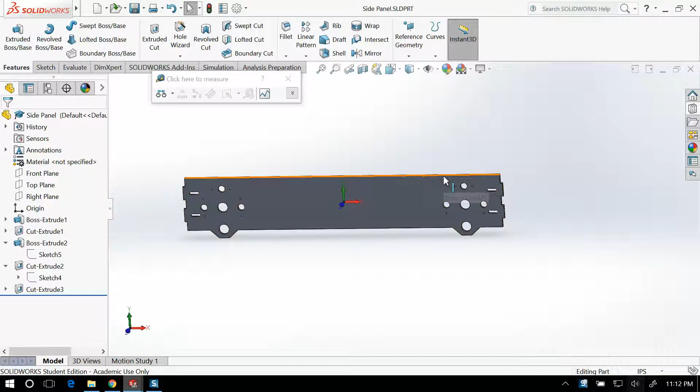Hey again, so what we're going to do now is actually create some tabbing at the top of our side plate so that we can start putting our top plate on. I'm not going to show yet exactly what our top plate is going to look like, but at the very least you should have some idea now that in order to make the robot pieces fit nice and snug together, we want to actually make some cuts in the actual metal so that they fit nice and snugly, and the bolting is just to keep everything in place without actually flying off. Okay, so let's get to that.

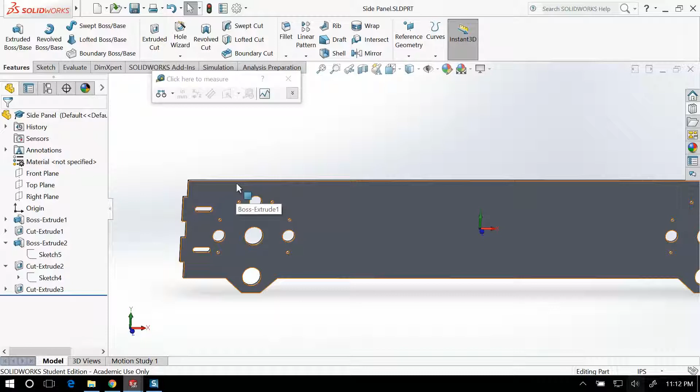Remember this is what our side plate should sort of look like now. I have my slots and my gearbox associated with this. In order to put something on the top, I'm going to want it to slot in or at least rest on the top without sliding back and forth. To prevent that, the top plate is going to have tabs, so I'm going to need to create some form of squared slots or little cutouts, teeth, or I guess anti-teeth, to allow the top plate to fit into.

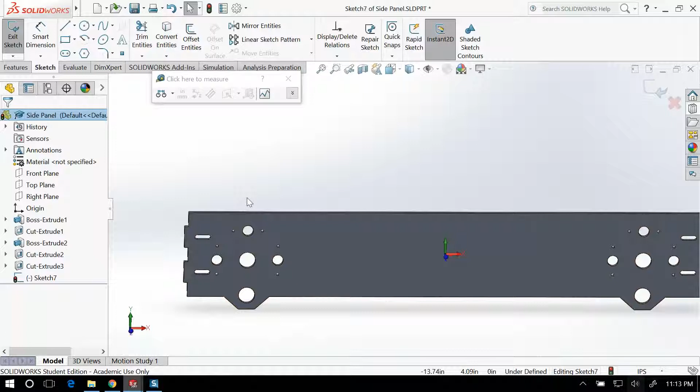So let's create a sketch. Once again, yet another sketch on this plate. You can start seeing that I have lots of sketches associated with cuts and extrudes here. This sketch is going to create a bunch of holes or teeth holes in the top of my robot. Let's just start off with one corner rectangle, and then go from there and see how many we can fit on. The width of my rectangle I want to make exactly 1 inch.

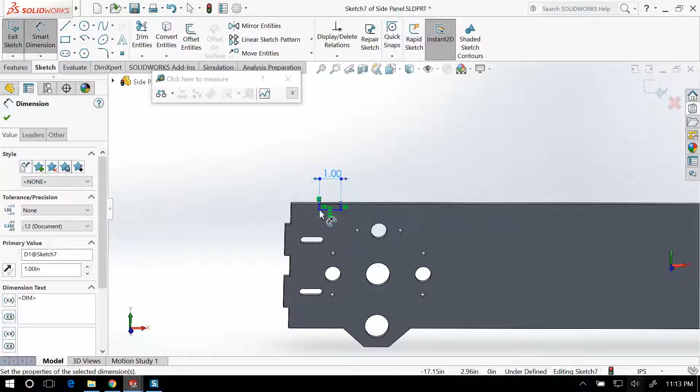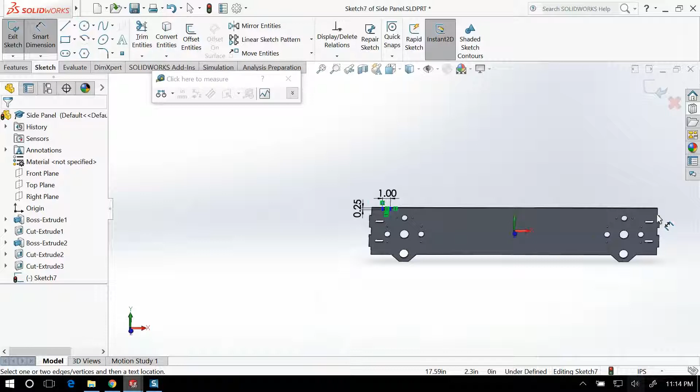Now the depth of it, that is always fixed. That's not up to you, that's up to the metal. Hopefully you realize by now that the thickness of the metal is exactly 1/4 inch. Now we're faced with a question of how we place all of these teeth along the top of this robot. I don't want to have a million teeth along the top, because that's going to be much longer to cut, and it just doesn't look nearly as nice. So let's play around with the linear sketch pattern.

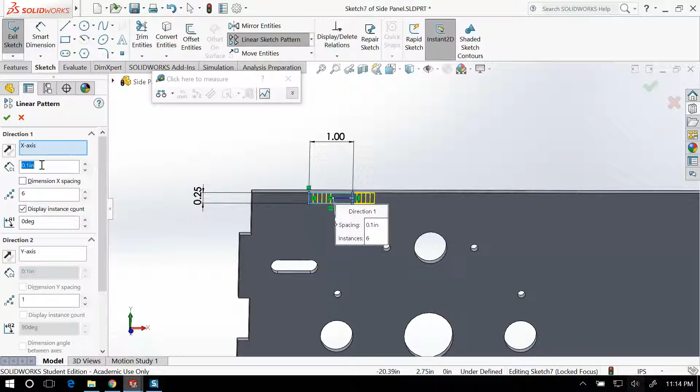I'm going to click on linear sketch pattern, and click on this box. In my x-axis let's make 6 of them. I guess I have to click on all of these. I want my spacing to be every 4 inches, because it looks horrible if it's every 2 inches. I've done that before, and you get a grid that looks like this, and it's just kind of a nightmare. So let's do 4 inches. You can even do 6 if you really want, but then your conventions are going to break from mine.

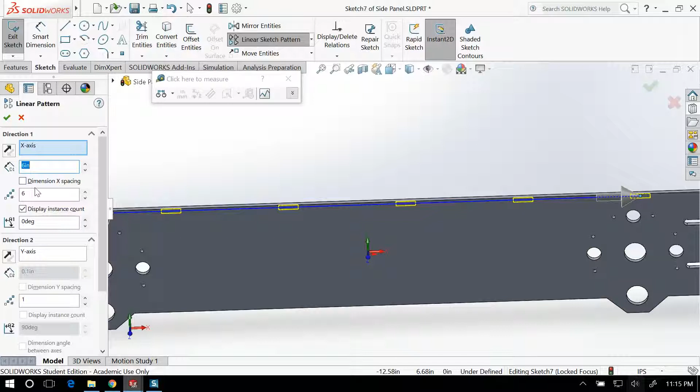Any top plate that you put along here is going to need to be at least 7 inches long in order to take advantage of having 2 of these slots. Because if I only put a top plate on one slot, it's going to tip back and forth. It will basically use the slot itself as a fulcrum and want to slide up and down. That's what we don't want. So I'm going to put this back to 4 inches, and keep increasing the number until it looks pretty good. So let's say something like that.

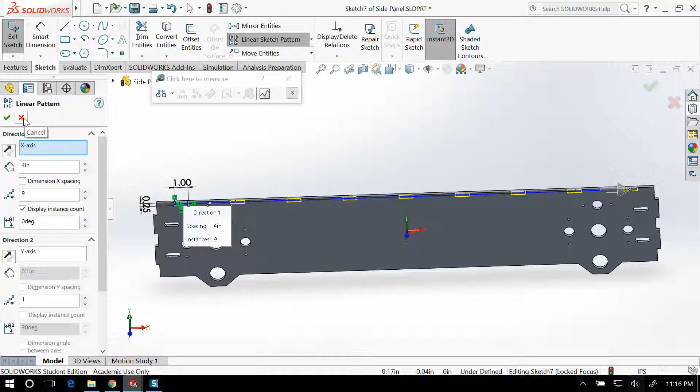Now, actually I'm going to cancel this, so I can see that I have 9 of these slots here in the first place. I'm going to cancel that linear pattern for a second. You'll see why. I'm going to drag the slot along the side here, and use that trick I've been using before, where I create a center line as a point of reference on my slot.

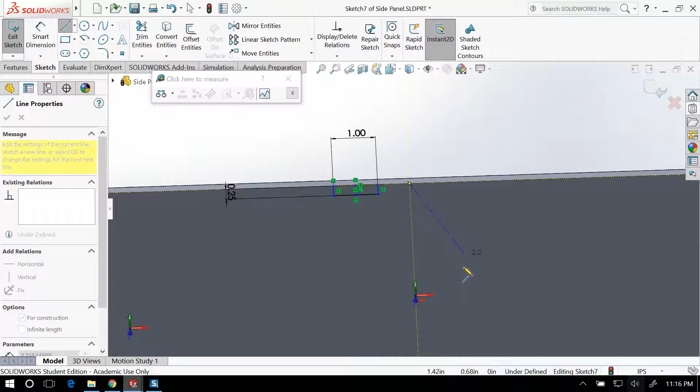I'm also going to create a center line from the center of my robot plate, which allows me to bring the slot straight into the center here. Now I can use my linear sketch pattern, and I'm going to highlight all this. I guess I can't highlight all this.

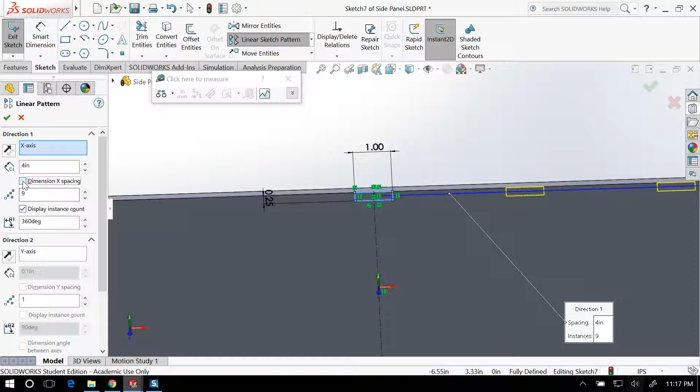I'm going to go back to 4 inches, and I'm going to go 9, I suppose. And unfortunately, it doesn't allow me to go both ways. So I'm not going to have 9. I'm obviously going to have 5 in that direction. And then I'm going to do the exact same thing.

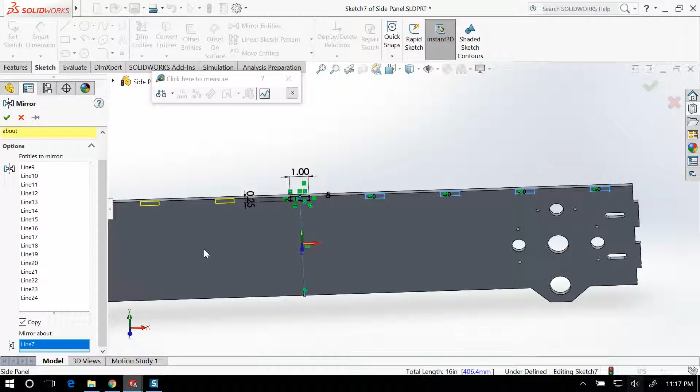So what I can do is I can do one of two things. I can either do the same thing, the linear sketch pattern, in the opposite direction, or I can use my trick that I love doing, which is mirror entities, by mirroring all of those entities along the side like that over there. And you can see that that has created a nice array of slots.

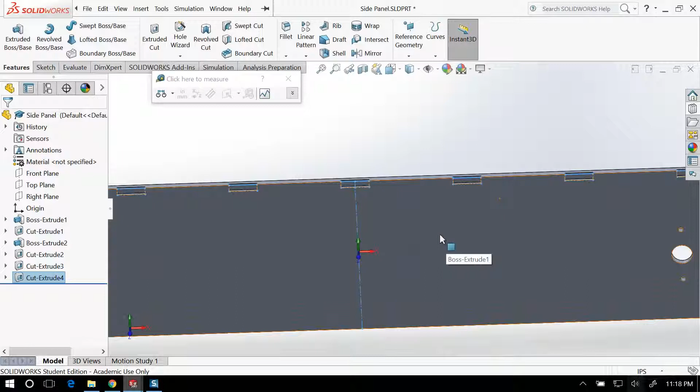Everything looks kind of crazy ugly right now, so I'm just going to exit the sketch for a second and make sure that it does what I want it to do. I'm just going to make an extruded cut and press OK on that. And my extruded cut was incorrect, so again I need to remind myself that I'm doing through all, and so now I've got my little jagged teeth at the top of my robot.

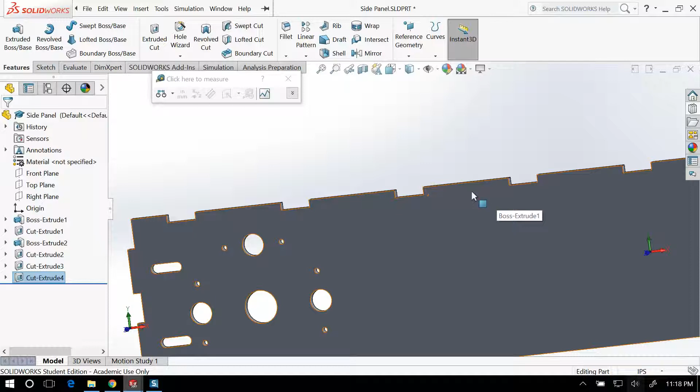The next thing that I want to do is create slots associated with this, and I don't really need a lot of slots. Really, I only need one to kind of keep the whole thing down, and the rest of it should kind of flow from there. So let me create a series of slots in the exact same way. And I can even just do this in the same cut extrude, but I'll just make a new one, a new sketch.

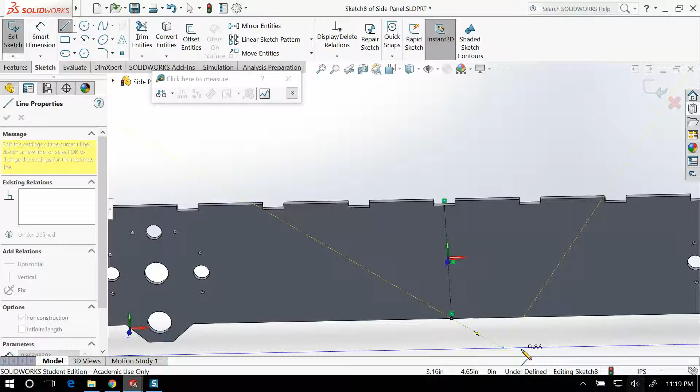So I'm going to go to Sketch, and let us make some more center lines because we are clever like that. I'm going to make another center line. Oops. Make another center line right here. And then again do the exact same thing that I've done before.

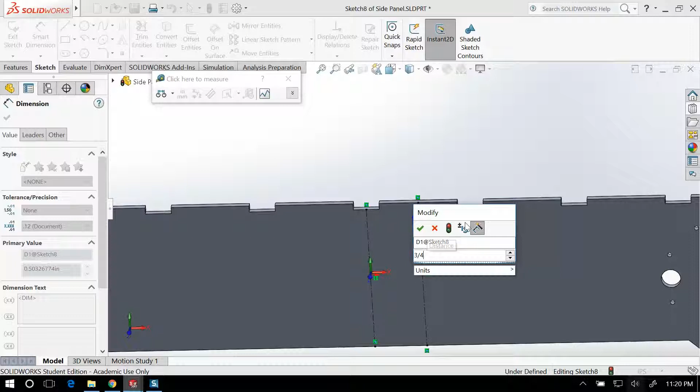Now these slots are a little bit different, and the reason why I say that is because they don't need to be as wide as the last ones were. They can be as long, so making it 3/4 of an inch is perfectly okay. But in terms of width, they absolutely do not need to be the same width.

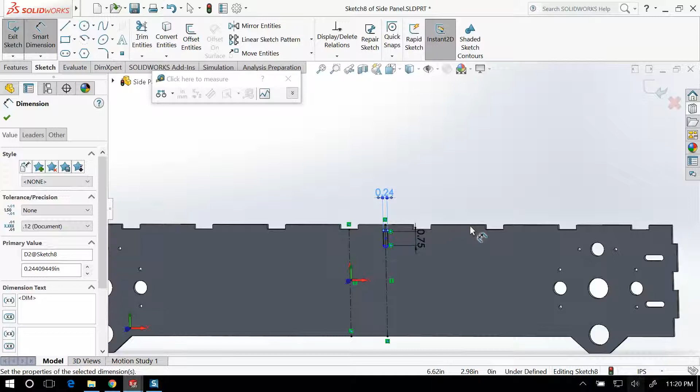And so what I'm going to do is I'm going to do it as 6.2 millimeters, because what we're going to do is we're going to use M6s for these slots instead, because you don't need nearly the amount of strength that you do for holding the whole robot together.

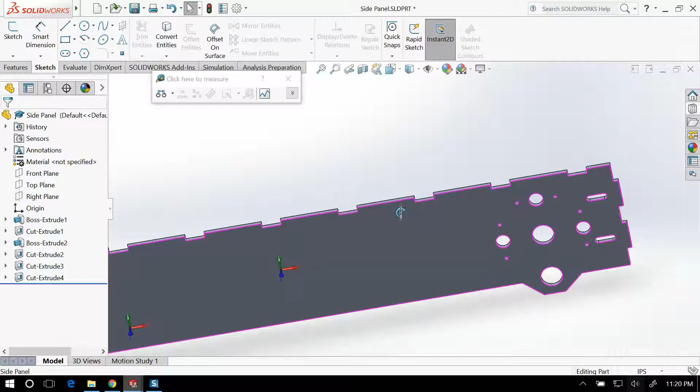Actually, I realized I made a mistake. I don't need slots at all in this case, so I'm just going to exit this sketch and delete it because I don't need it anymore. Because what we're going to end up doing is we're probably going to weld any of our top plates along the top here.

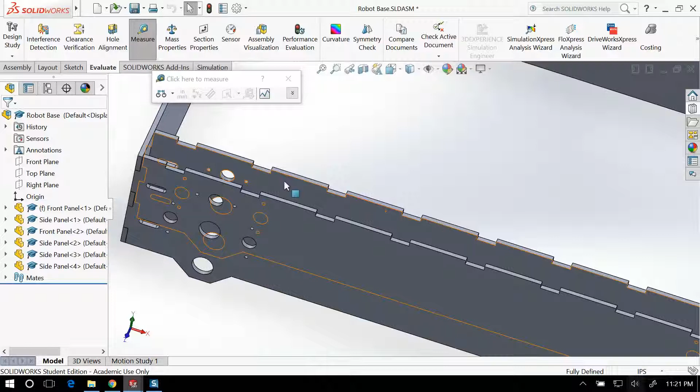Okay, so let's generate the top plate associated with this. So let's get out of this part and into the actual assembly. And so now you can see that I can create a top plate that connects pieces like this here, here, here, and here in various ways, shapes, and forms. And so the way to do this is by creating a little piece that has an extra nub on either side that has at least 2 tabs on either side of it so that it's able to actually fit down.

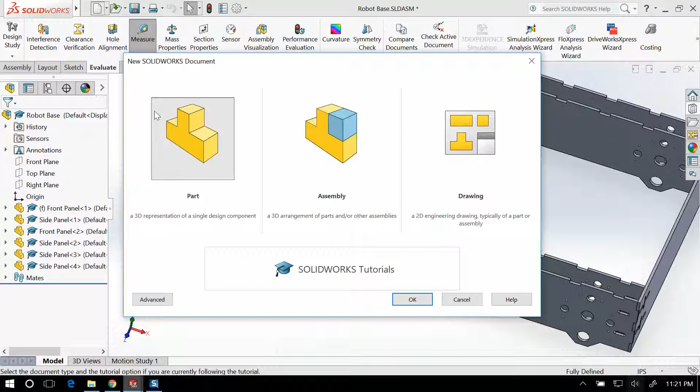So let's just go ahead and create one of those. So I'm going to go and create a brand new part. I'm going to need a few references for this brand new part, but let's go to Sketch. I'm going to create it in the top plane because that's going to be very easy for me to place it once I do that. At the start, I'm just going to create a good old trusty center rectangle.

And the width of this rectangle is going to be something that I measure here. So I'm going to go into my robot, and I'm just going to measure the distance from this plate to that plate, so the outside of both of these plates. And that should be exactly 2.25 inches.

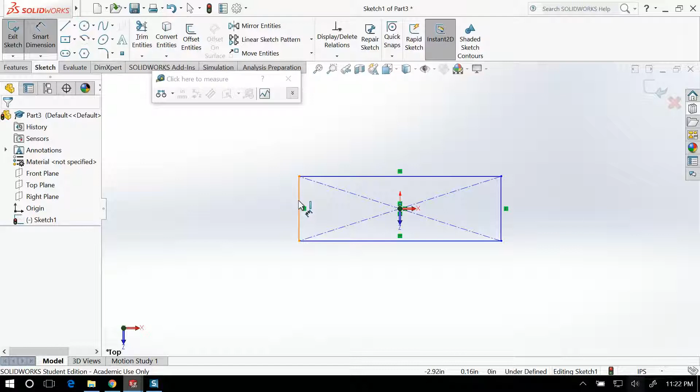So I can go ahead and do that in my document here. I'm going to go ahead and smart dimension this width, and that's going to be 2.25 inches.

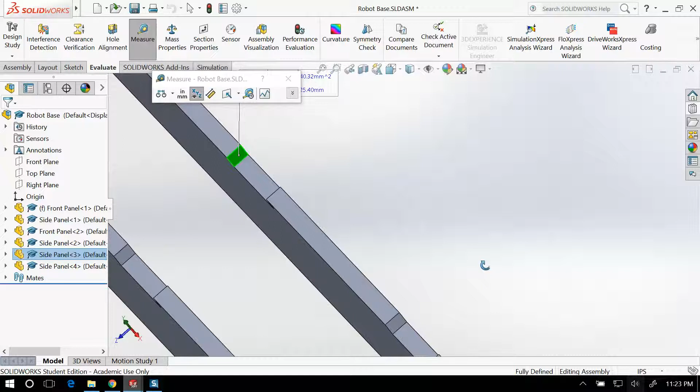Now the length is going to be a little bit tricky. I want it to be able to overcome both of these tabs. So let me measure that distance, and hopefully you get the amount that you expect. If I measure from that side to this side, it gives me 5 inches exactly. So that's good.

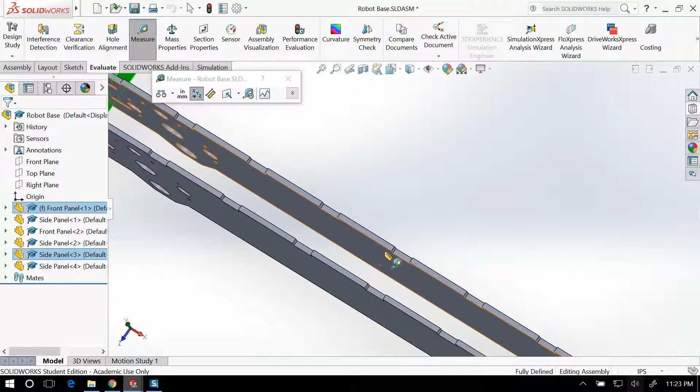For my own reference, I'm going to measure the distance from here to there, and that's 1.25 inches, so I can give an extra inch on either side. I can make this a 7-inch piece and it should fit into this assembly. So let me go ahead and make this 7 inches long.

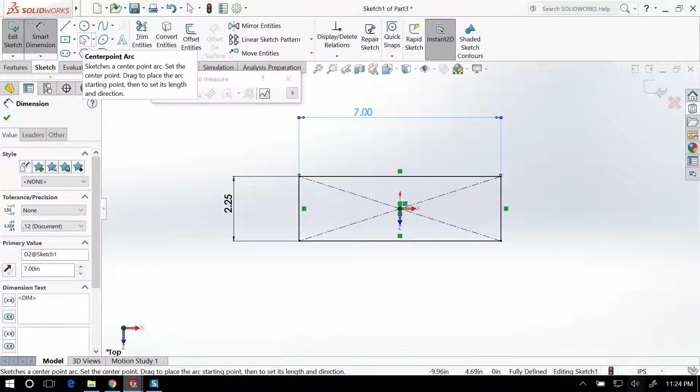Now all I have to do is make a couple of cutouts and make sure they are exactly correct. So I'm going to create another sketch, exit this sketch, and extrude it. Features, extrude, and that's going to be 1/4 inch. Done.

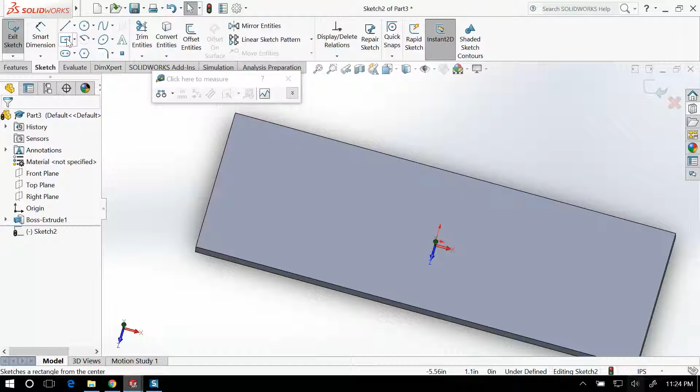Now I'm going to do another sketch on this, and this is where I'm going to create the insets essentially of where this is going to be going in between the two plates of the robot. So let me create some very useful lines of symmetry. There's one, and then here's going to be another useful line of symmetry.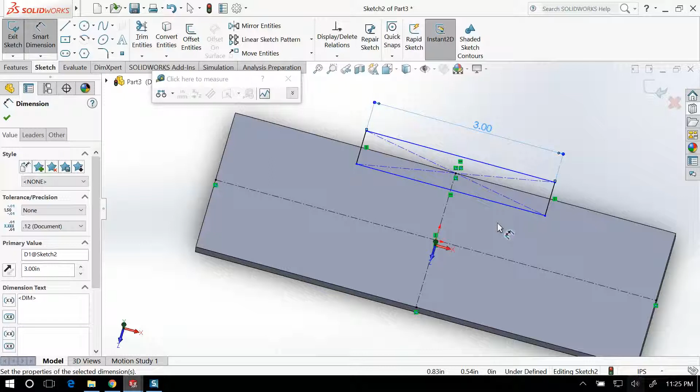Next, I'm going to create a center rectangle and end up cutting out more than I actually need. So I can smart dimension this. I make the length of this rectangle 3 inches, because remember, the length between the edges of the tabs is 4 inches, so the inside of the tab length is going to be 3 inches. And the width, I could make it the distance from the edge of here to the edge of here, and I'm just going to make it 1/4 inch because that's the width of my metal.

One more time, I'm going to make a corner rectangle instead and do the same thing, where I can essentially create a center line and I just need to smart dimension this here. And this needs to be 1 inch.

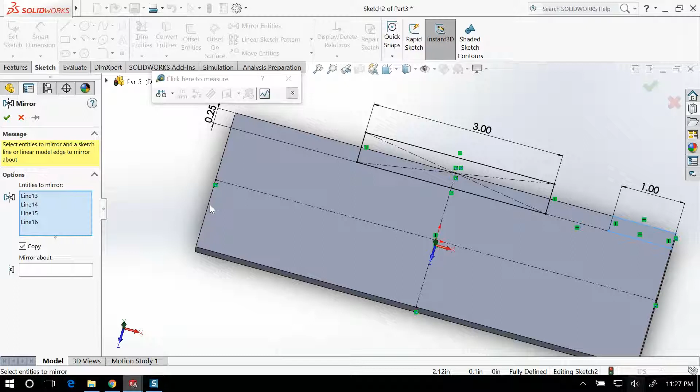Now, again, I use my tricks. I'm going to mirror entities, and mirror it about. Actually, if I just do mirror entities, I can just click on one of these, right? It does all of them. Nope. Okay, mirror entities, click on the whole thing, and mirror that about this center line here.

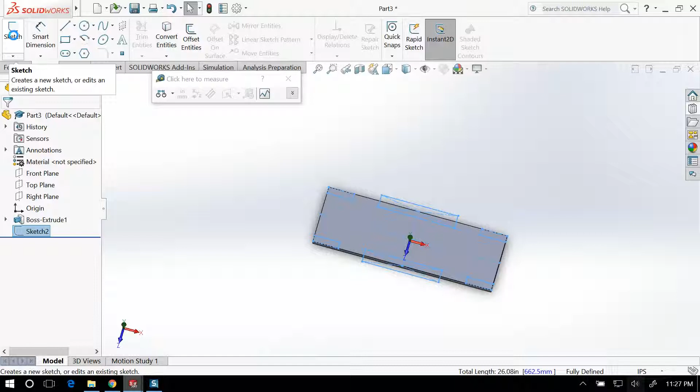So now I have 3 pieces, and then finally I'm going to do mirror entities again, highlight all of this, and mirror it about that line there. Press OK, then exit the sketch, and go to Features, Extruded Cut, and again do Through All, press OK. So now I have the plate that should be able to fit into my assembly.

One thing I forgot to do is give it a little bit of extra tolerance. So I can do this one of 2 ways. I can either give extra tolerance on the base, or give extra tolerance here. So what I'm probably going to do is give a little bit of extra tolerance on the base.

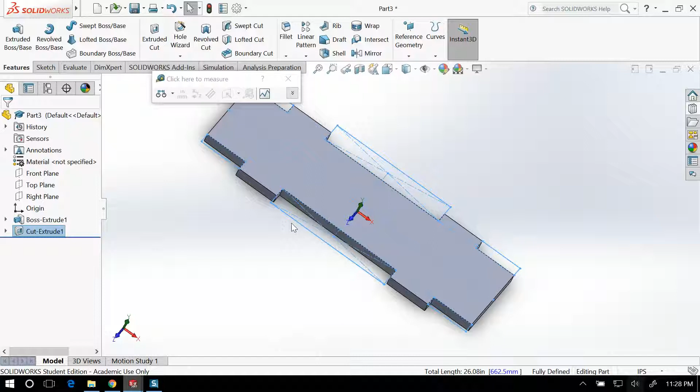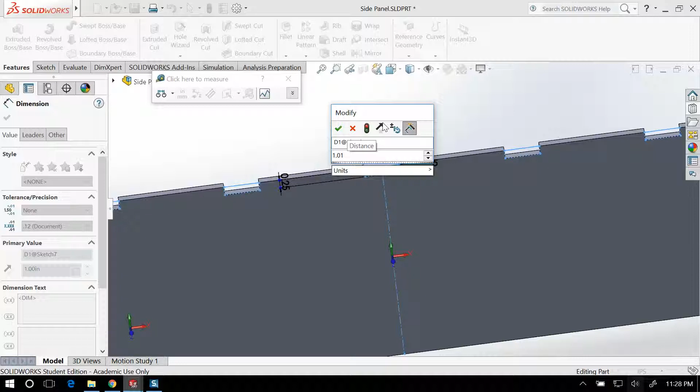Let's go to the base for a second. I'm going to open the side panel here, and I'm going to go in and give a little bit of tolerance to this. Instead of making it 1 inch, I'm going to make it 1.01 inches, and then I'll just press that, and everything should be completely fine.

Save that, go back to my assembly, rebuild the assembly, and now I can import that component that I've created, which I haven't saved, so that's why it's not able to import it. So let me go back and save this part, and I'm going to call it Top Plate.

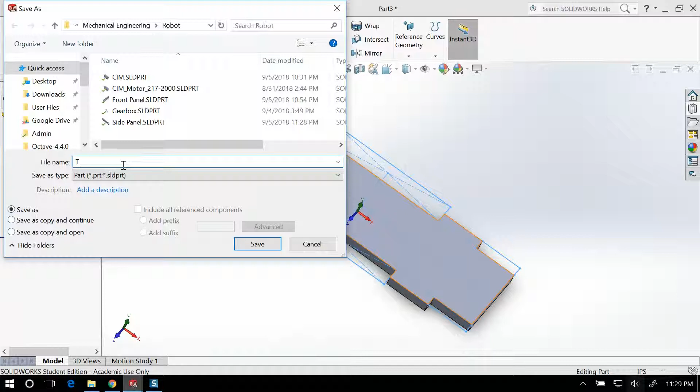Insert components, top plate. Now you can see here's my top plate. Hopefully everything fits nice and snugly together.

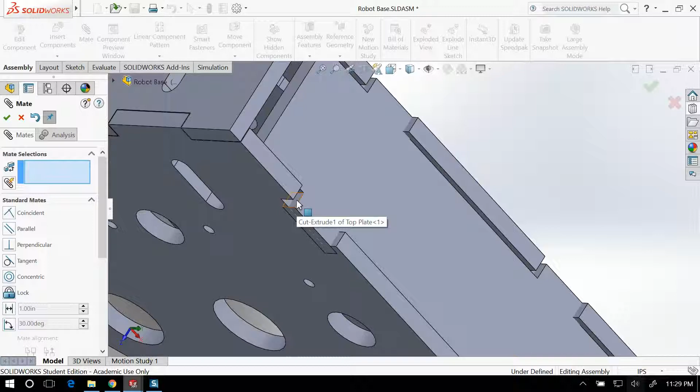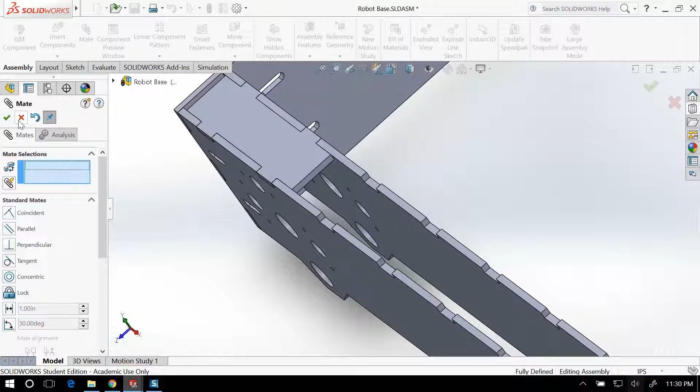So let's try it. I'm going to click on Mate, click on this here, and click on that there. There's one mate. And I click on this here, and click on that there. That's my other mate. And finally I click on the underside of the piece with the top of that, and press OK there. I'll say OK to that. My mates are doing well.

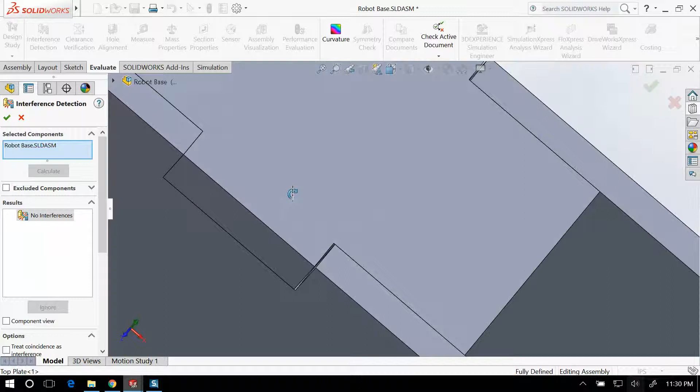One thing I can do is interference detection. I can just press calculate on the robot base. Normally you wouldn't just press calculate, but because there are so few pieces it calculates quickly. It says no interferences, so everything here is working well. You can also see that this extra little bit of tolerance is keeping everything looking relatively nice, and that extra tolerance is happening over there as well.

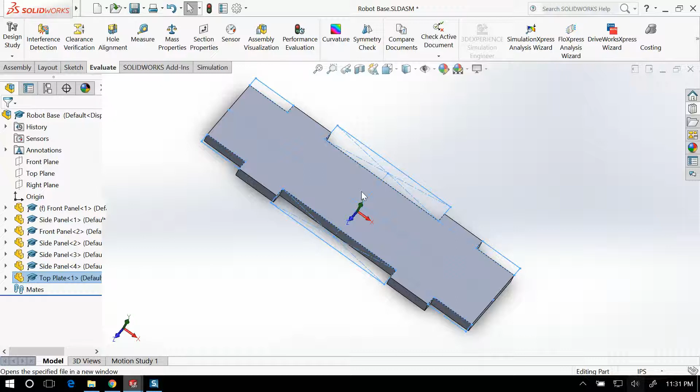Now what I'm going to do is go back, and the last bit here is just edit this top plate so it can have some slots in it. To do that, we're going to do the same thing we've always been doing, making patterns. I'm going to go into Sketch, click on this here, and create a straight slot.

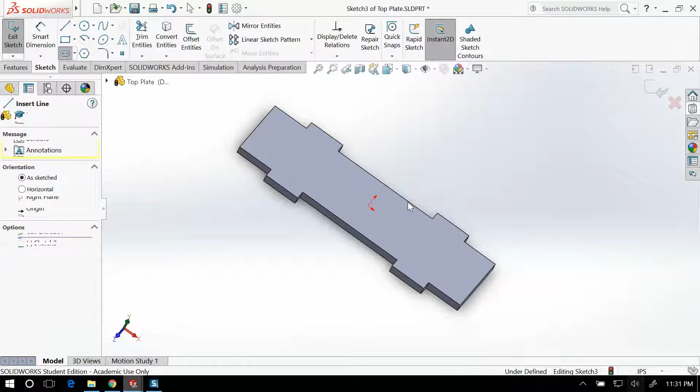Actually, I'm going to use my little trick where I make a center line from here to there, and create another center line from here to there. Just as a check, this should be an integer number of inches. Yep, that's 2 inches, so I should be able to do exactly what I want.

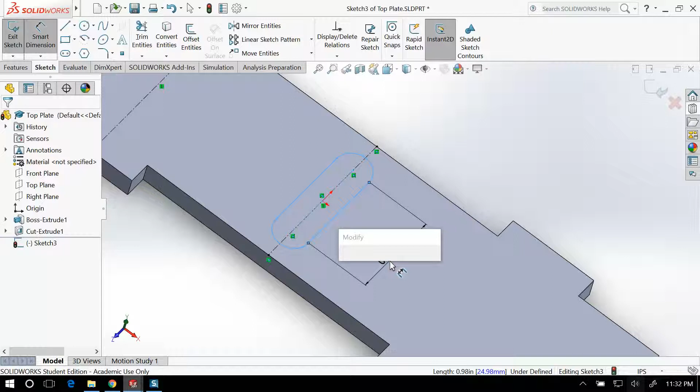So I'm going to go back into my sketch and create a straight slot that goes from here to there. It doesn't really matter, but what matters is that the center of this should be lined up straight on the center of this center line. I'm going to do what I've always been doing before: make this 3/4 of an inch, and make the width of it 0.24 inches.

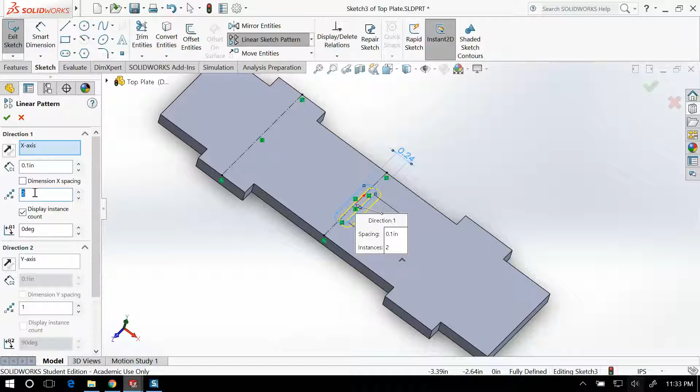I'm going to get out of Smart Dimension, and do a linear sketch pattern, then mirror entities. Let's do a linear sketch pattern of this whole slot. I'll create the spacing at 1 inch apart, and press OK on that. Then I'm going to mirror entities of those slots about this line. Done.

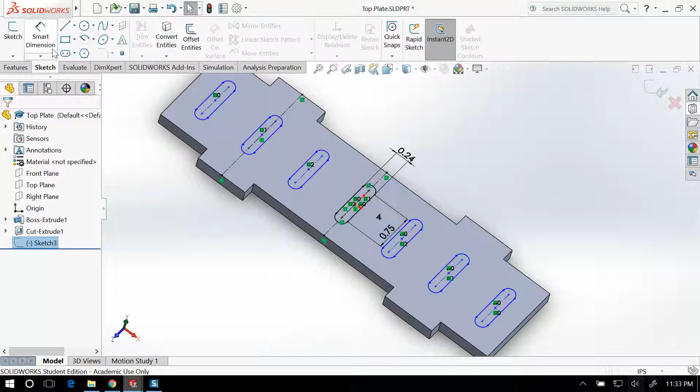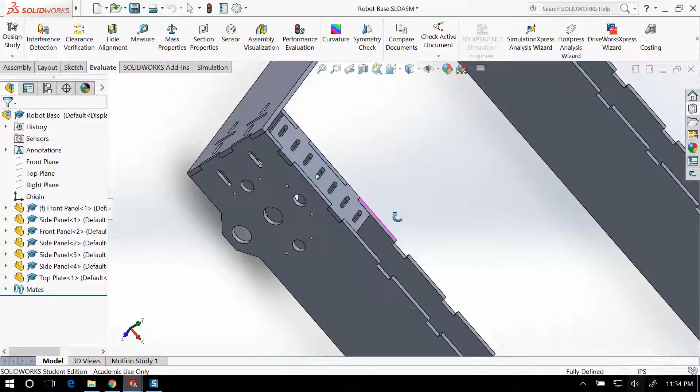Exit the sketch. Features, extruded cut, through all. Now we're done, and we've created a nice little grate. It looks like a grate up here on the top plate, which will serve as a way of fixing things to the top of our robot if we need to. It also provides a nice bit of security as well if we need that.

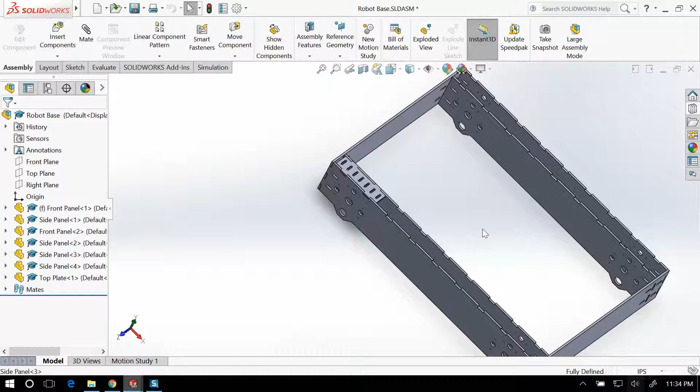So I'm just going to go into the assembly. You can see here I can fit multiple of these all the way along down here. I probably won't be able to fill up all these slots if I look at this correctly, because I have 1, 2, 3, 4, 5, 6, 7, 8, 9, and these top tabs take up an even number of them. But you don't have to cut that many — you can just cut 1 or 2 and be done with it. That is how to create these little top tabs here.

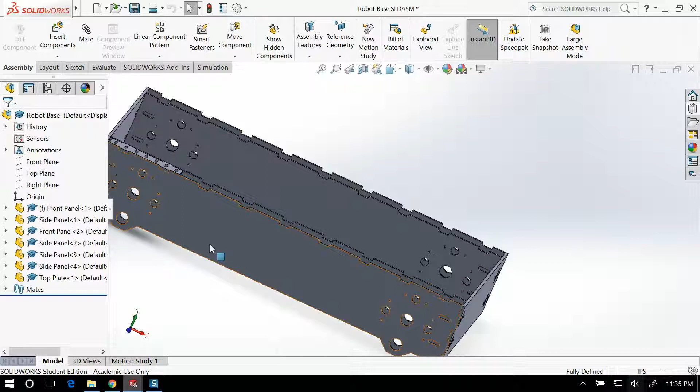What I want you to do is decide how you're going to be mounting things to the bottom of your robot. I'd suggest placing some slots in the bottom and creating a bottom plate that will slot through there. You can make that out of polycarbonate, Delrin, or even metal if you want. But that's something you should be thinking hard about — how to fix things to the bottom of your robot.

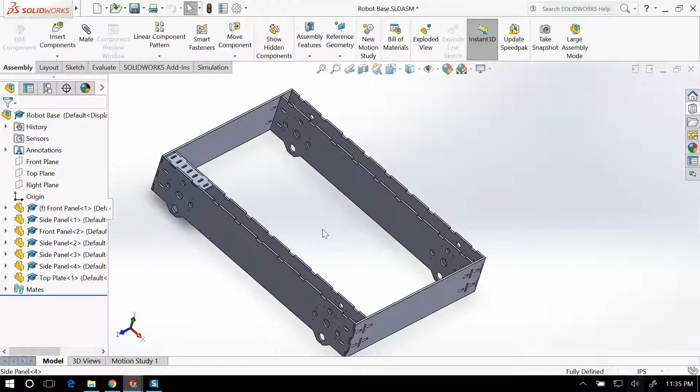I think once we start moving into groups, that's something you'll be able to start executing on your own. Okay, so that's the end of the tutorial for the basic parts of your robot.

What's left to you now is to decide how you're going to make a nice pattern in the sides. You can make it a different pattern using different pieces, or the same pattern across all sides, front and back. But please make sure it's reasonably good looking, as well as reasonably cutting out a lot of weight.